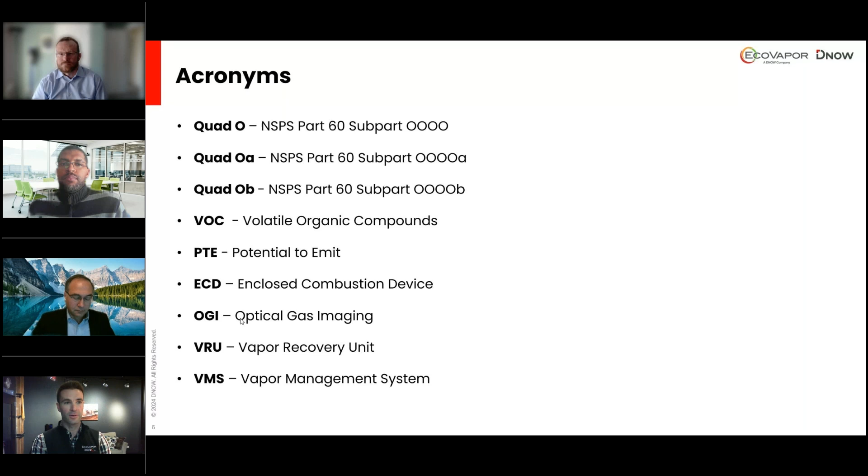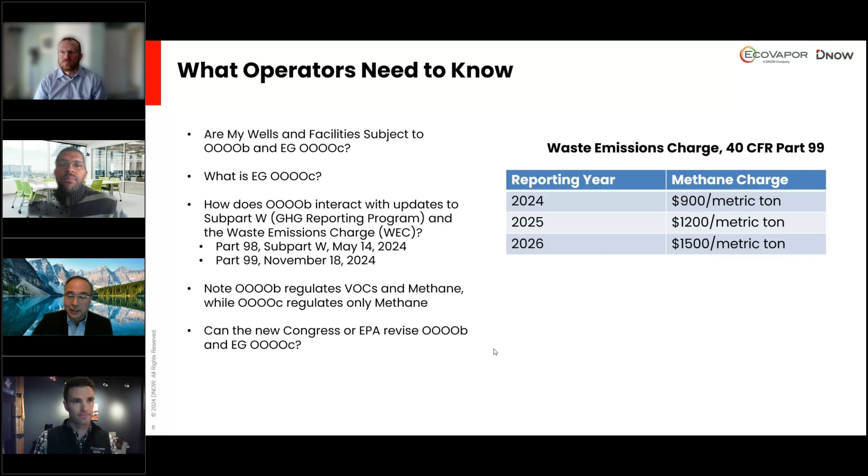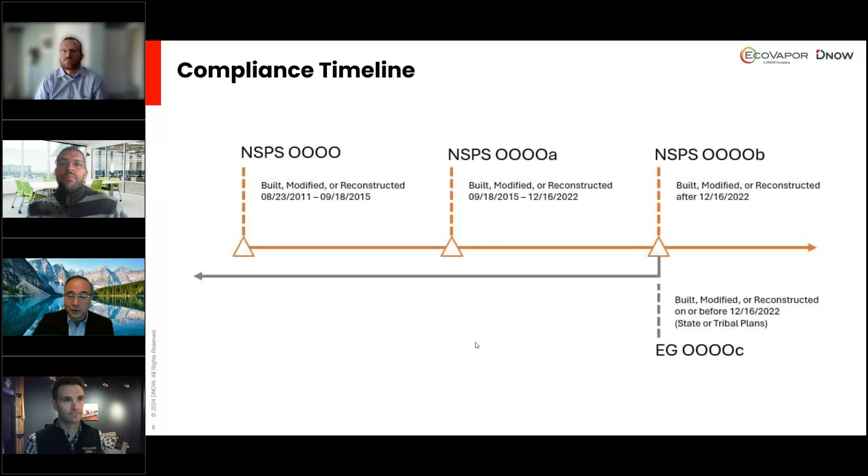So next, I'm going to go through some of the particular aspects of this rule that affect some of the facilities where vapor recovery units that Marcus and Chad are talking about might be helpful to you. I'll start with well completions. So a well completion, this is the step after drilling a well to prepare it to produce oil and gas. And this includes fracking and flowback.

Quad OOOb puts these wells into 2 groups. Subcategory 1 has all wells except wildcat, delineation, and low pressure wells. These wells have higher requirements because they're closer to infrastructure. Subcategory 2 is for the wildcat, delineation, and low pressure wells, and these have less stringent standards.

For subcategory 1, you have to have a separator on site for the entire flowback period if you're going to frack the well. And for initial flowback, which is the stage before it is technically feasible for a separator to function, you must route the liquids to a completion or storage vessel, but you don't have to control the initial flowback gas. Once the separator can function, then you enter the separation flowback stage, which lasts until production starts.

During separation flowback, you route the liquids to a storage vessel, a collection system, such as a produced water gathering line, or you re-inject the liquids into a different well. You also have to route the gas from the separator to a flow line, meaning a sales line, or re-inject it or use the natural gas on site as fuel.

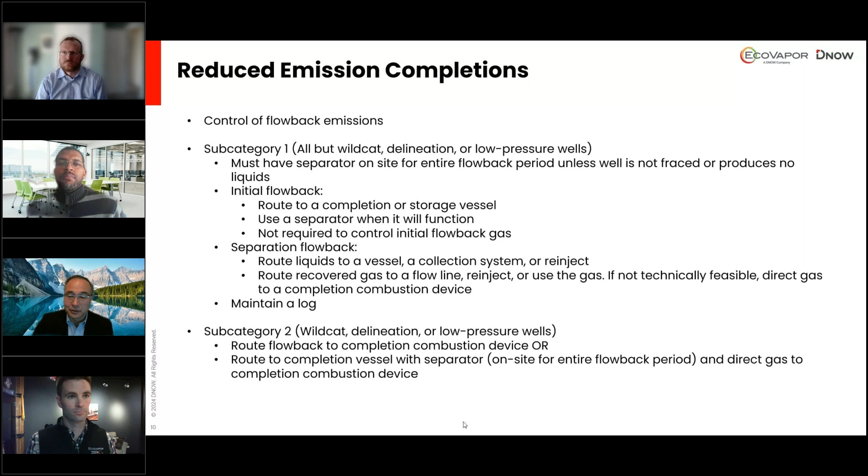So turning to associated gas wells, these are wells that produce oil or condensate along with natural gas. Historically, if there were no gas gathering lines or infrastructure in place, operators would sometimes vent or flare the gas.

There have been some state rules to restrict this, as well as BLM has its waste minimization rule that it finalized in late 2023. But EPA is sort of getting into the game here with its Quad OB restrictions on associated gas wells. The rule generally prohibits venting and flaring of associated gas.

And I would just point out that the flowback emissions I just talked about before you enter the production phase, that is defined as not associated gas. Likewise, if you are getting natural gas from a wildcat or delineation well, that is not associated gas. And so this rule does not apply. But under Quad OB for associated gas, you cannot vent or flare, with some exceptions for when flaring is allowed.

If you demonstrate that it is technically infeasible to route that natural gas to a sales line or use it on site or re-inject it, you can control it to 95%. And I'm using this term flaring, but control it to 95%. You must make this demonstration and annually certify that it is not technically feasible to route the gas to sales or use it or re-inject.

There's some dates here about a phase-in. A well that is drilled after 2024 can only use this exemption to flare through 2026, so only for 2 years. But the wells that are slightly older can continue to certify annually and control gas to 95%. There are also some temporary exceptions for flaring during malfunctions, maintenance. If you lose your gas takeaway capacity, you can temporarily flare, and in very limited circumstances, you are allowed to vent for just a few hours, very short periods of time. That's for new wells under Quad OB.

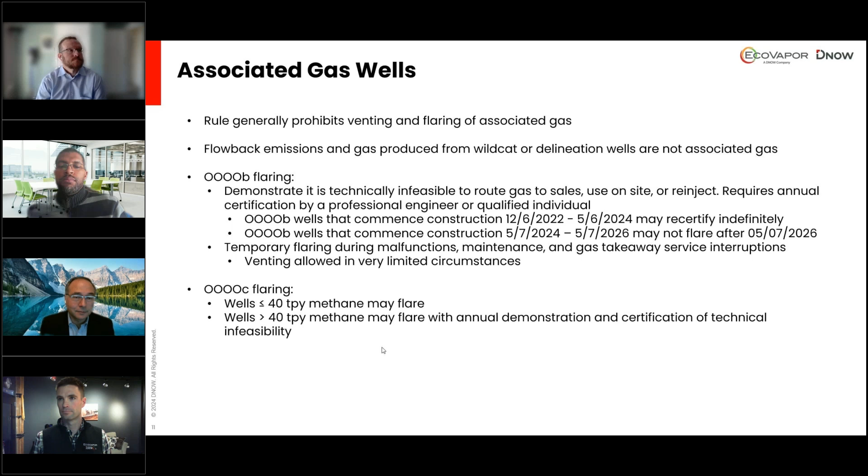And this is going to be my last slide on storage vessel requirements. So storage vessels are subject to Quad OB if the potential emissions from the tank battery are 6 tons per year of VOCs or 20 tons per year of methane. And again, this is per battery, it's not per individual storage vessel.

If the uncontrolled actual emissions rate drops below 4 tons per year of VOCs and 14 tons per year of methane over a rolling 12-month average, you can remove the controls, but you may need to put the controls back in. If you refracture the well, you have to control emissions from the tanks immediately. And if your emissions from the tanks just rise, then you have 30 days once they exceed that level of 4 or 14 tons per year. The requirement is to control emissions by 95% from each tank battery.

But I would point out that, again, your Quad OC tank battery can become subject to Quad OB if it changes. So if you make certain modifications, and that would be adding a tank, replacing a tank in a way that increases total capacity, if your throughput increases, if you add a new well, or if you frack a well, that is a modification and you'd be subject to Quad OB immediately. So your deadline would be accelerated. You'd have to comply with the federal rule and not wait for the state plan.

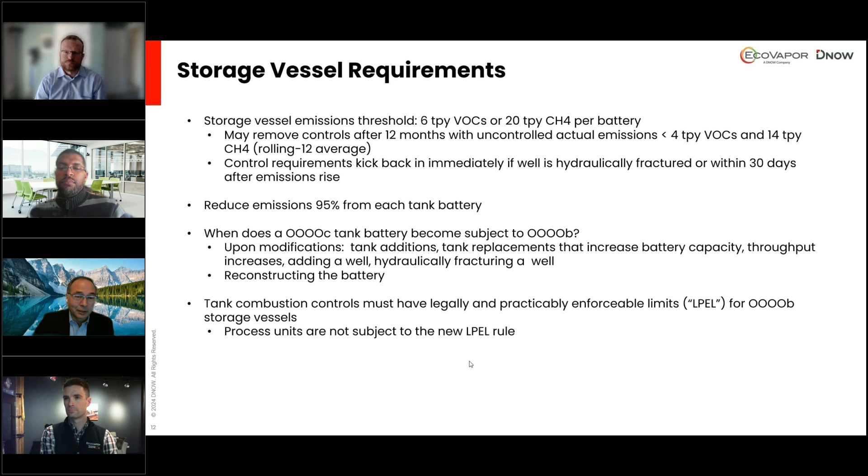And then finally, combustion controls or flares are subject to some pretty extensive requirements about legally and practically enforceable limits, monitoring, record keeping, performance testing to make sure that you're getting the 95% emissions control. If you use a process unit, which could include a vapor recovery unit, that is not subject to these requirements. And turning it over to Chad.

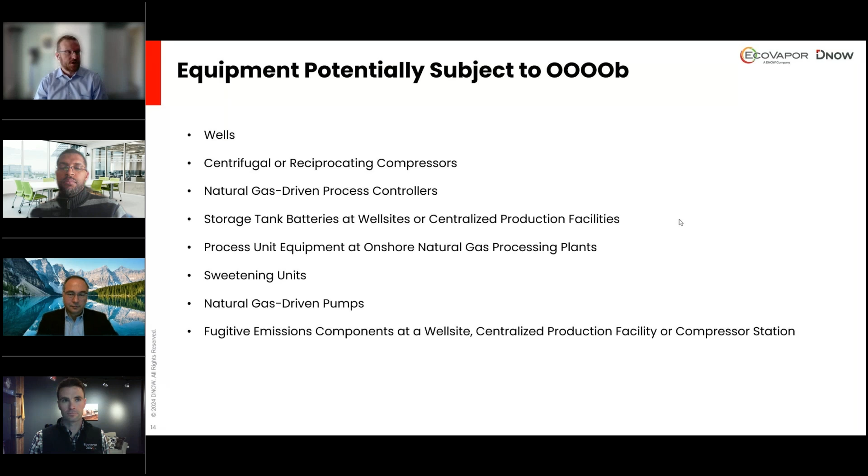Thanks, Chris. As you can see, here is a list of the equipment that is potentially subject to Quad OB. You should understand and know these pieces. Nothing has really changed from the previous Quad OA regulation. Some of the definitions have changed, but overall the equipment itself is pretty much the same. But on the next slide, we're going to discuss those differences between some of these regulations.

When it comes to the differences between Quad OA and Quad OB, the centralized production facility definition was actually formalized under Quad OB. It wasn't necessarily in the definitions previously, but it was mentioned a few times throughout the rule. There's also wells. The wells changed. Previously, it was if you did a completion operation with fracking or refracturing, that it would pull you into Quad OA. Now it's just a matter of newly drilling a well. If you newly drilled a well, then you can be pulled into Quad OB.

There's also the inclusion of regulations that Chris had just discussed about associated gas and those requirements when that well is newly drilled. For pneumatic controllers, they changed the definition a bit.

Beforehand, pneumatic controllers were more specifically anything that had a gas usage rate of 6 cubic feet per hour or more. Now it's simply a process controller. And there are requirements associated with that that kind of change the game compared to how it was previously done.

When it comes to storage tank batteries, there's some new criteria, and Chris briefly covered that as well. When it comes to emission thresholds, many of the thresholds were always at 6 tons per year for VOC emissions. Now there's a new threshold of 20 tons per year for methane. You have to look at both of those components to determine whether or not you exceed those limits. It's also now based on not just the number of tanks, it's based on the entire battery itself.

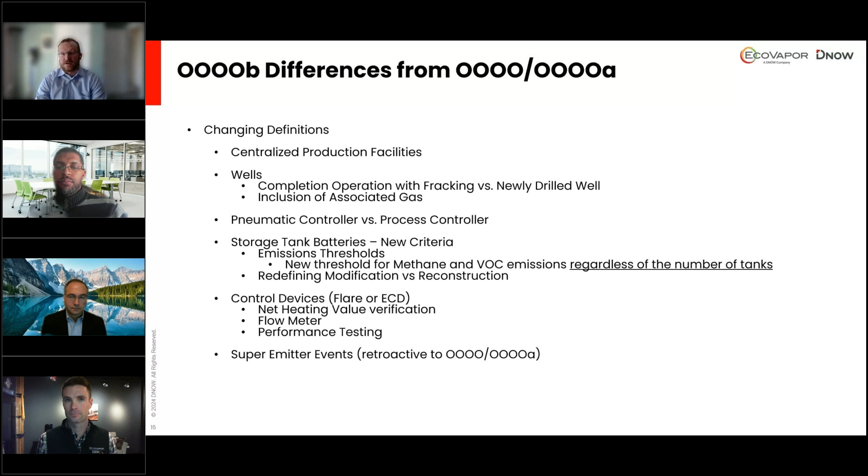And the interesting thing about this is there's a threshold over which, if you are above that threshold, you have to do a full investigation. The interesting thing about super emitter events is that EPA didn't just include it in Quad OB, they also included the language back in Quad OA and Quad O. So anything that meets the applicability dates and is determined to potentially be above that emissions threshold, the operator may have to do a full investigation.

Now, that investigation cannot be initiated by anyone. It has to be by someone that is a qualified third-party reporter. There is a process that you have to go through that the EPA would approve that party. There is also a means for that party to be removed as a third-party reporter. As far as the EPA notification goes, once the EPA notifies the operator, they have 5 days to begin the investigation into the emissions.

And that investigation has to be completed within 15 days of receiving that information. If there is no oil or natural gas facility within 50 meters of the coordinates that are provided by EPA, then the operator simply has to follow up with the EPA and let them know. At that point, there's no further action required.

However, if you find that it is your facility and there were some potential for leaks that were in exceedance of the threshold, then that operator would have to begin that investigation. And there's a number of items that have to be reported. There's a lot of details. You have to go through maintenance records and see if there were any malfunctions or anything that could cause that event. You have to do an OGI or Method 21 inspection to identify any leaks.

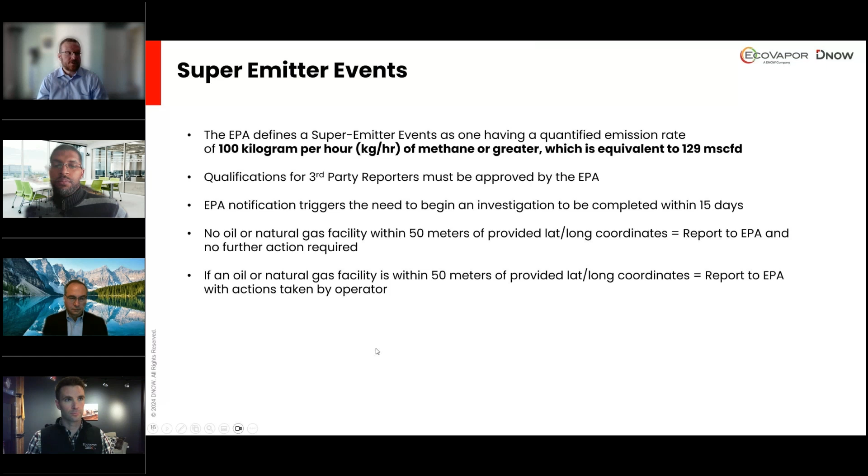Awesome. Thanks, Chad. Yeah, let's talk about a couple of ways to achieve that compliance. But before we do, I think we can call a thing, and that is that the rule is massive. I don't know if other folks have had a chance to crack the book open on Quad OB, but there's a lot in there. In fact, same is true with Quad O, Quad OA, now B and C. Individually they're extensive, but altogether there's just a lot in there to understand.

And I think that it's good to take a look back and say, okay, what has changed, but what remains the same? And over the past 10 years, there has been a lot of change, but what has remained a constant is that the EPA wants to see a decrease in emissions, and I don't think that they're alone in that. But their target has been a 95% reduction in uncontrolled emissions. That stayed fairly constant. And they also want those reductions to be effective, reliable, and ultimately verifiable. But how do we get there?

The regulations themselves, they have evolved and continue to do so. And as has already been mentioned, the threshold potential to emit requirement of 6 tons per year for VOCs, that's been in there before. 20 tons per year of methane. Chris and Chad already talked about this, but I think it's worth reiterating that potential to emit threshold now applies to the entire tank battery, not just the tank. So that's new. That's an evolution right there.

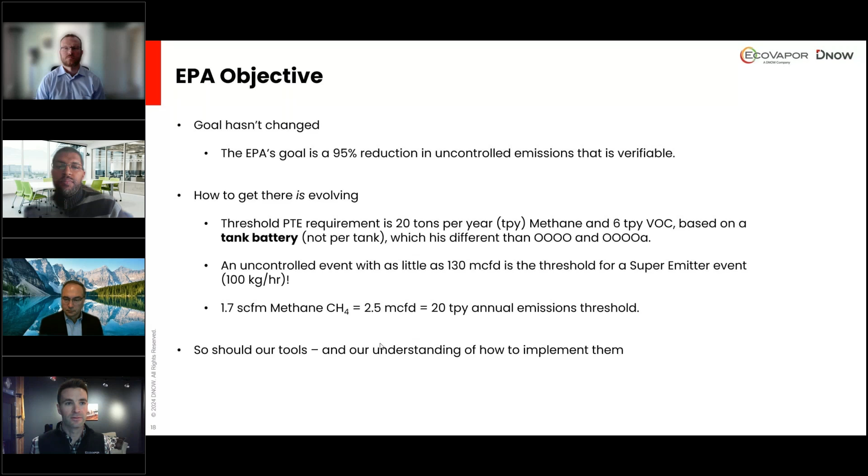But just like the regulations are evolving, so should the tools in our toolbox. And just like tools that we use in the shed, same principle I think is true for the ones that we use in the oil field. And that's that the knowledge of how to apply a specific tool for a specific purpose is critical. How that tool is used and applied makes all the difference. So I'll pass it over to Marcus to take a look at the status quo, and then we'll take a high-level look at some of the tools that EcoVapor has developed and how they can be applied to meet the requirements in Quad OB and C.

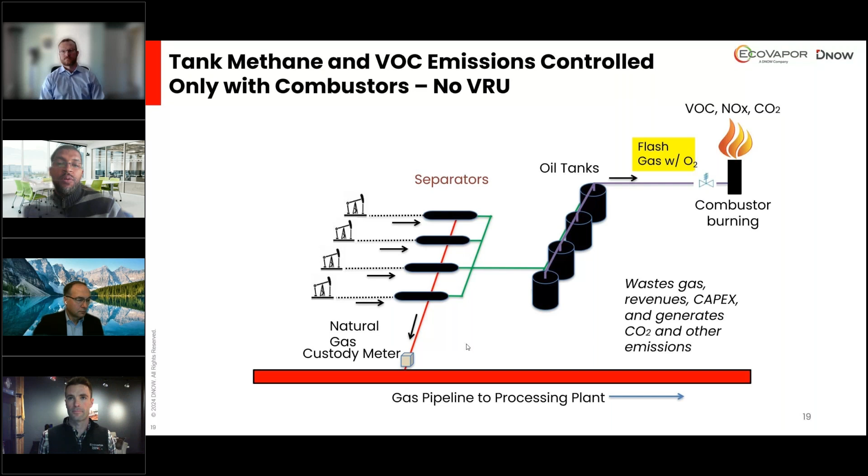And to illustrate the super emitter point a little more, depending on the application, there's 4 oil tanks here. If you can imagine, those are 4 750-barrel oil tanks. This configuration is potentially a super emitter event.

So let's start talking about some of the tools. How do we look at that status quo a little bit differently? And we'll start out with the ZerO2. Why would an operator think about this? It's simply to put the would-be emissions into the pipe and sell them, and not put them into the air as emissions. The purpose is to dramatically reduce the emissions footprint of a production facility, and to do so profitably by selling that gas.

So how do we do that? Well, by removing the contamination that pipelines don't allow. We've done other webinars on this topic where we go into a lot more specifics. That's really not the purpose of today, but at a high level, oxygen corrodes the infrastructure, the gathering network. No one likes pipeline leaks. It's also very reactive, and it messes with downstream processes like amine treatment. So therefore, pipelines have strict quality specifications for gas to enter their gathering network.

And just like other gases, oxygen seeks equilibrium. That's a function of partial pressure and Dalton's law of diffusion, but that means that it goes where it's not, especially in low pressure environments like tank batteries. So what is this? This is a self-contained, self-controlled skid that purifies oxygen out of the gas that's typically found in vapor that's recovered from tank batteries, allowing for its recovery and sale.

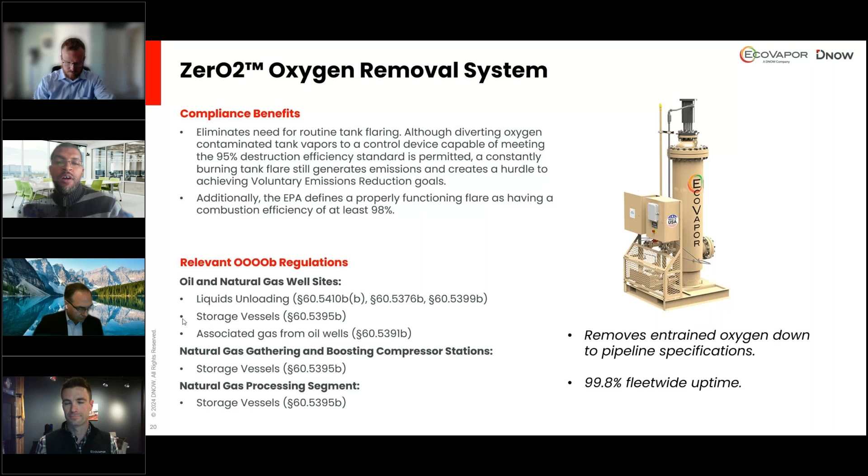For liquids unloading, if the technology does not result in venting, then you are primarily responsible for record keeping and reporting only. If there is a venting event, it would fall underneath Quad O, and you would need to implement work practice standards. For storage vessels, this is where we're most commonly installed, like I alluded to in the last slide on the uncontrolled tanks. It's applicable to tank batteries with greater than 6 tons per year of VOCs and or 20 tons per year of methane. Similar to what was mentioned earlier, you must demonstrate continuous compliance with the 95% capture. Luckily for us, the ZerO2 is a catalytic system that has no moving parts, one in, one out, so we offer a greater than 99% uptime to all of our clients.

And so in this facility, you have a little different example. This is an example of a client who is capturing their tank vapor as well as gas from the truck loading via VRU. So VRU is just a compressor that moves gas, and it monitors the pressure level of the tank and the truck so that you don't generate a vacuum and crush them. But anyway, this gas that you can see is generally in an atmospheric storage vessel and or low pressure tanks that get exposed to air.

During the day, it gets warm, the temperature rises, the tanks breathe, and air contaminates it. So, like we mentioned earlier, oxygen is a contaminant to pipeline operators. It accelerates corrosion, and it makes other downstream processes problematic. And it potentially moves them closer to a premature failure. And I think we've all seen enough high-profile pipeline failures in our lifetime.

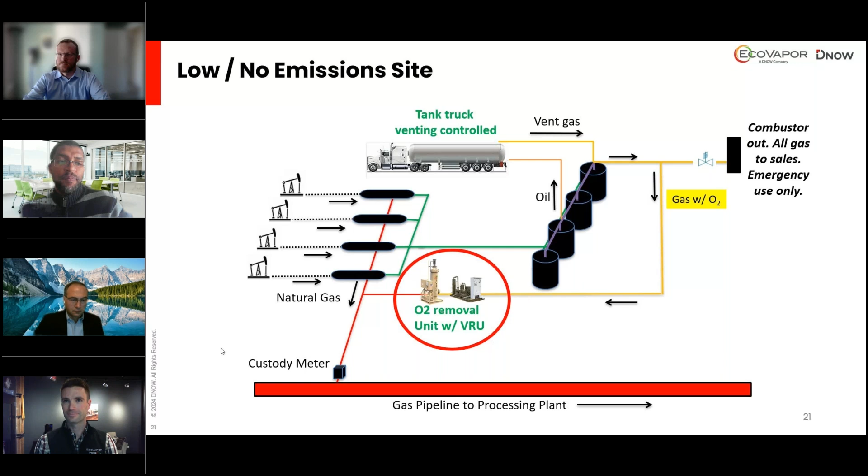The ZerO2, like we stated earlier, is a catalytic system that exceeds these expectations for pipelines really across any weather condition or however strict a pipeline wants to be on oxygen, with more than a 99% uptime. Thanks, Marcus. So let's talk about another tool. We call this one the Sulfur Sentinel.

There are a lot of application cases, and honestly, our EcoVapor clients tend to introduce new ones to us on a somewhat regular basis. But one of those applications is very similar to the ZerO2, and that's where it's used to remove contaminants from the gas stream so that gas can meet pipeline specification and be sold rather than vented or flared. Specifically H2S. So by removing H2S, or sweetening the gas, using a simple and effective tool in a manner that self-adapts to varying flow rates and varying H2S concentrations.

It does this by using a dry media adsorbent that's contained in a proprietary vessel design that is customized for the application conditions. We look at H2S concentration, flow rate, operating pressure to come up with the way that we think is going to be the most predictable. It's got a low pain in the butt factor. There's no knobs. Again, it self-adapts and removes those contaminants from the stream so that they can be sold.

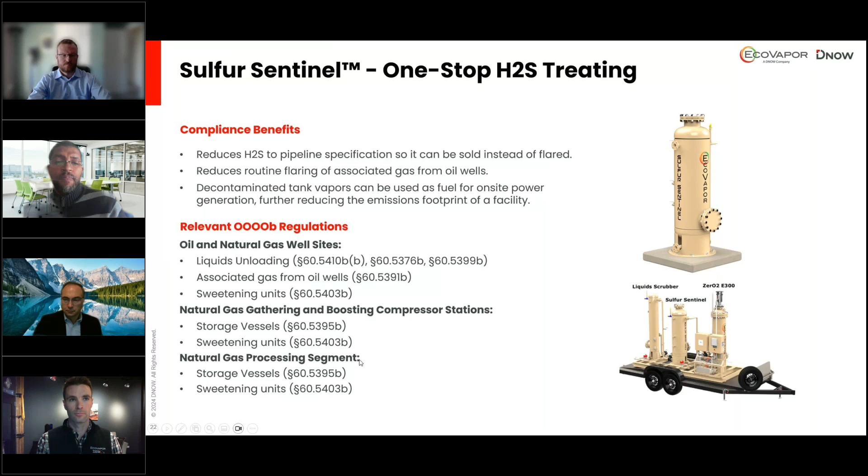Cool. The last tool in the shed we'll discuss today is the Tank Commander. And the simple why behind this is to get it all. The purpose here is to capture and sell all emissions on a facility, particularly one equipped with a vapor recovery tower upstream of that tank battery. Again, in other webinars, we've discussed at length how there's a discrepancy between volumes generated in the tanks between what's modeled in the software package and what's actually measured on site. That's not today's focus, but at a high level, it's fair to say that there can be significantly more vapor generated in a tank battery than what a software package like Promax or HYSYS would suggest. So what is this?

Well, this is a system that maintains tank battery pressure, both positive and also prevents vacuum conditions. It prevents vacuum conditions so that there's not an enormous inrush of air. Over 25% is where the ZerO2 reactor tops out. We can process out a quarter of the stream as being air, but once it gets to be more than that, that can be a lot. So we prevent that. But also, by maintaining the other side of the pressure window for tank batteries, positive pressure, there's no venting to worry about. You don't need to worry about detection or investigating super emitter events. If there's no gas to vent, then it won't vent.

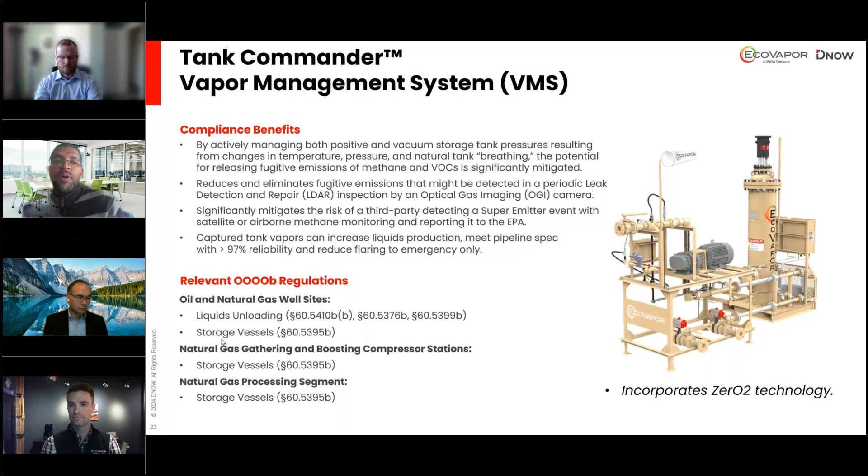And so the VMS system can still monitor the tank pressure and suck the tanks down appropriately, as well as if there's a truck loading event. And then it feeds that gas along with the leftover gas from the VRT to the VRU. That gets kind of counted by the client, and then that gas can get sold.

And then in this case, the flare is off or emergency only production. And due to the simplicity of that system, it results in the highest reliability, lowest lease operating expense option to get it all and capture whatever the VRT leaves behind.

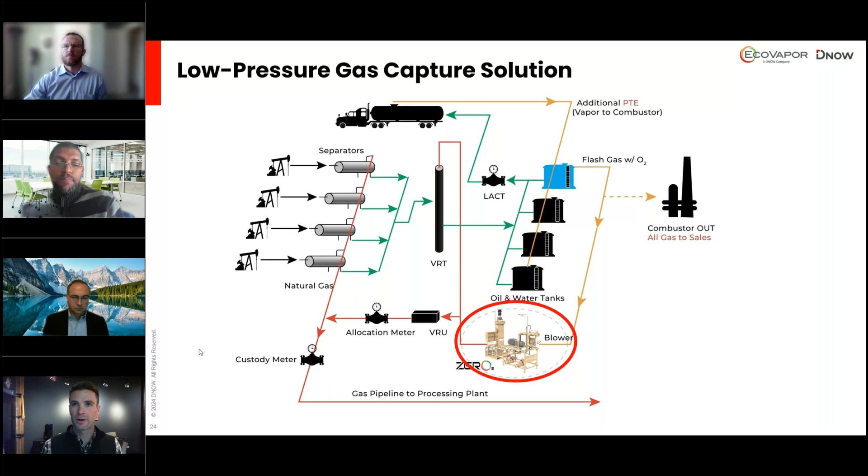All right, let's move into Q&A. Thanks, Chad, Hans, Chris, and Marcus. We do have a couple questions that have come in, so I'm just gonna kind of throw them out there and see who wants to chime in and answer it.

This one's pretty specific and it feels like a Chad, but I'll just throw it out there. I have an existing tank battery with only one well producing into it. If I drill a new well 1 mile to the east, connect it to the existing battery, is that entire battery now subject to Quad OB?

I would say yes, because you're routing new fluids to that existing battery. That would bring the battery into Quad OB when it comes to the storage tanks, potentially. You still have to look at the emissions, and then you'd still have to include LDAR as part of that. As part of your fugitive emission components, you'll have to do an investigation, whether it's the OGI camera or Method 21 along those lines. You'll need to look at that battery and the existing well as part of that.

And then as far as the new well goes, it would be subject to Quad OB because it is a newly drilled well. But I believe the rules for that are that it just has to do the AVO inspections. Okay, great. Thank you, Chad.